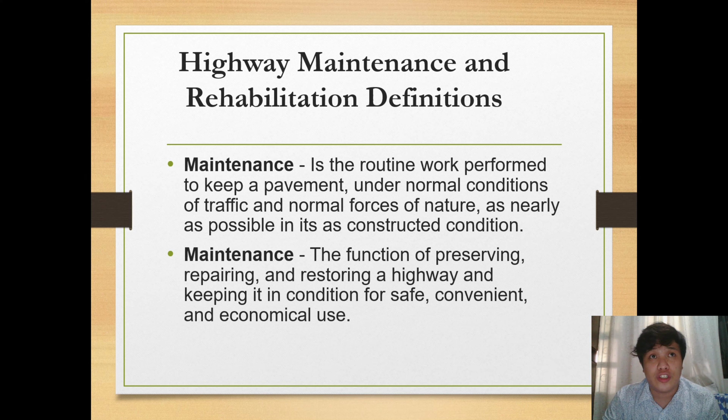Highway maintenance and rehabilitation definitions. Maintenance is the routine work performed to keep a pavement under normal conditions of traffic and normal forces of nature as nearly as possible in its as-constructed condition. It is the function of preserving, repairing, and restoring a highway and keeping it in a condition for safe, convenient, and economical use. So maintenance of the highway is routine work to keep a pavement in condition, basically for use of the people.

It includes both physical maintenance activities such as sealing, patching, filling joints, and so forth, and also traffic service activities, which include painting, pavement markings, and litter removal. Since we are living in a tropical country, we do not apply removing of snow and ice since we only have two seasons.

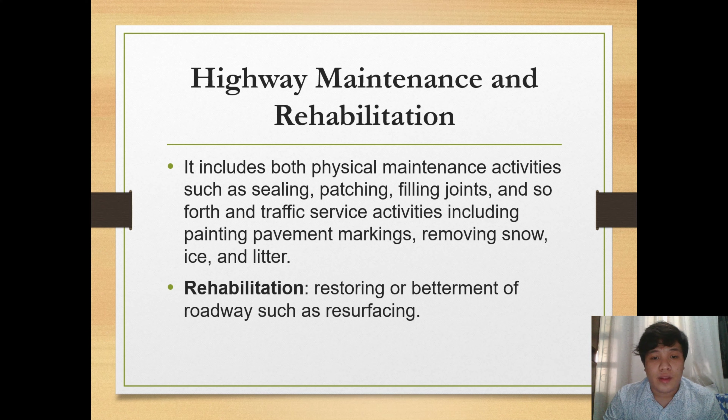The next topic is rehabilitation. Rehabilitation is restoring or betterment of roadways such as resurfacing. When we talk about rehabilitation, we talk about the renewal of the pavements and rehabilitation programs. It is designed to offset the effects of weather, vandalism, vegetation growth, and traffic wear and damage, as well as deterioration due to the effects of aging, material failures, and design and construction faults.

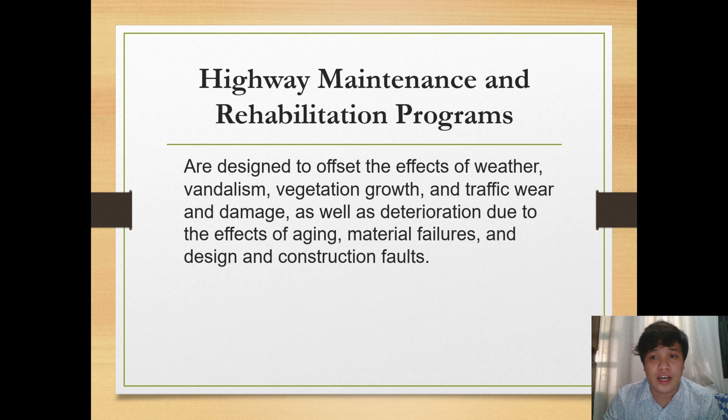An explanation of this is that it is also designed to have a program that can offset the effects of all the stresses that cause our pavement to deteriorate.

So why are maintenance and rehabilitation necessary? All pavements require maintenance, but stresses producing minor effects are constantly working in all pavements. This includes changes in temperature and moisture, traffic, and small movements in underlying or adjacent earth. Distresses are visible evidence of pavement wear, or for example, they are the end result of the wear process which begins when construction ends.

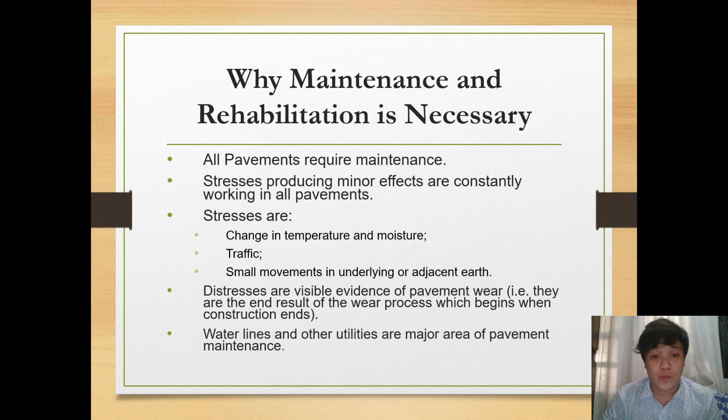Water lines and other utilities are a major area of pavement maintenance. Now, how important is highway rehabilitation, and of course its challenges?

The importance of it is that it protects investments made in highways, economic and safety of the public road system. It is also one of the main reasons why we are having an economic status that is increasing, or I mean, it is one of the reasons why we have our economic status today.

It connects cities from countries to countries and so on. The challenges include increased roads, additional mileage of travel, road function and classification, vehicle sizes, and traffic. The traveling public expects a higher level of maintenance, and there's the size of the maintenance budget.

These are the challenges, because when we have rehabilitation in highways, we need to have an alternate road. For example, that is the increased roads challenge, and also a very particular challenge is the size of the maintenance budget. We need to compute the exact budget for it.

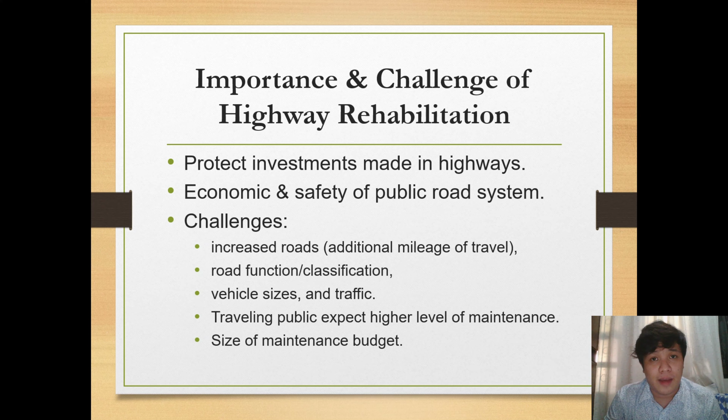Some effects on highway rehabilitation: urban highway rehabilitation projects create problems not only for state highway agencies and motorists but also for commercial premises. For businesses dependent on highway traffic, these projects can potentially disrupt the flow of customers that provide essential business revenue.

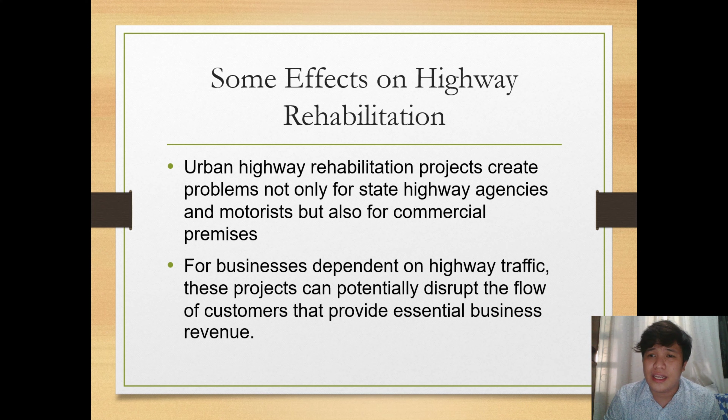Basically, one of the effects is especially for the business industry. Highway is really needed or very important, for it connects the business to the people, allowing it to provide the essential needs of customers, like food, school supplies. We need to have a proper highway, because highway rehabilitation really gives a negative side to businesses.

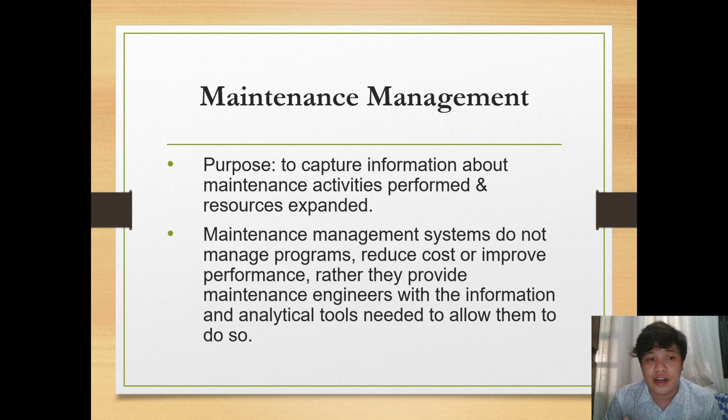Next is maintenance management. Its purpose is to capture information about maintenance activities performed and resources expended. Maintenance management systems do not manage programs, reduce costs, or improve performance. Rather, they provide maintenance engineers with the information and analytical tools needed to allow them to do so. During this procedure, we need engineers or professionals.

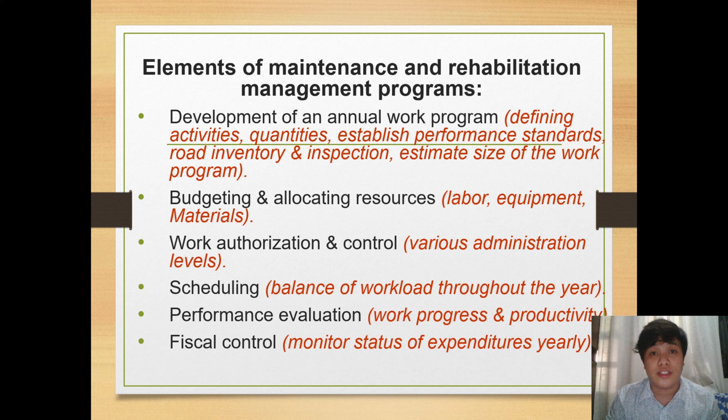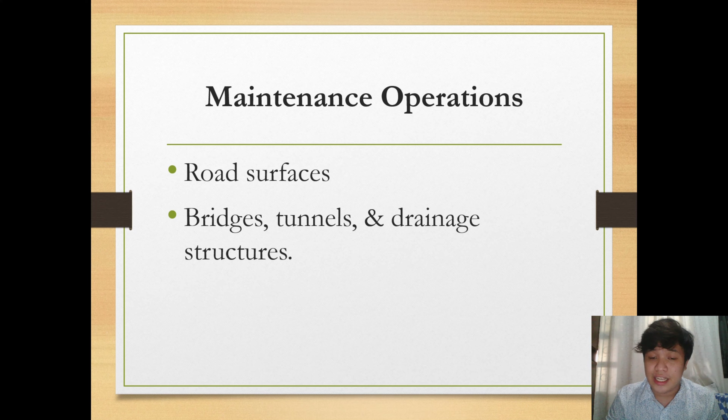For operations, we have samples of road surfaces and bridges, tunnels, and drainage structures. For road surfaces, aggregate road surface failures are due to improper drainage, poorly mixed materials, and inadequate foundation. For bituminous surfaces, failures are due to weathering, failure of base or subgrade due to material quality or compaction, or improper drainage. For plain cement concrete (PCC) surfaces, failure is due to buckling.

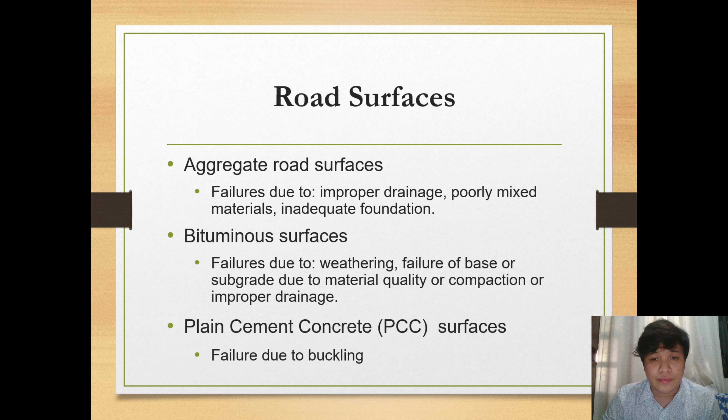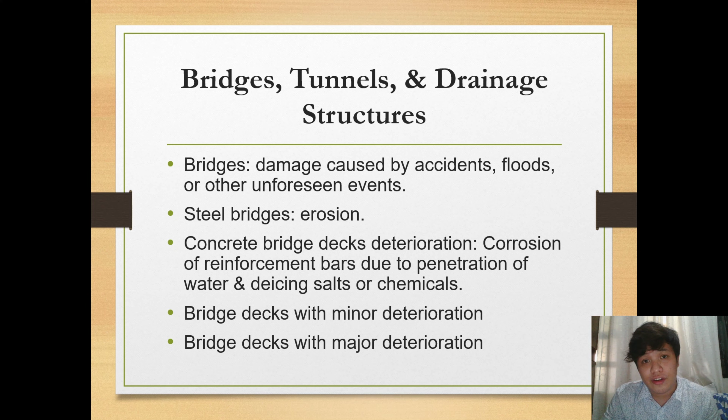For bridges, damage is caused by accidents, floods, or other unforeseen events - mainly floods and accidents. For steel bridges, it's erosion, and concrete bridge deck deterioration is corrosion of reinforcement bars due to penetration of water and salts or chemicals. This results in either minor deterioration or major deterioration of the bridge deck.

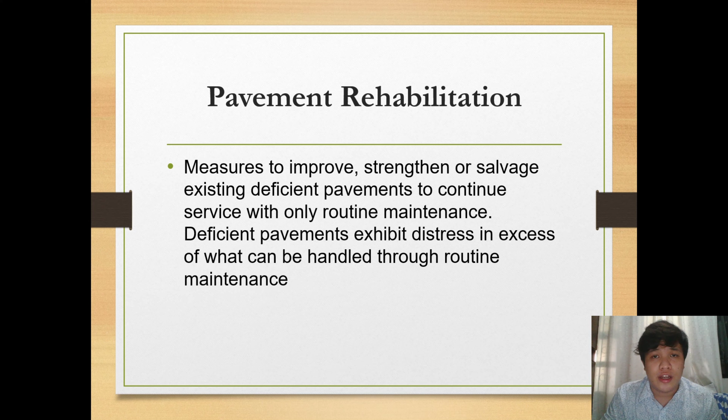Conventional rehabilitation methods include reconstructing with all new material, patching, and overlaying with a new wearing surface. Due to high construction costs, new methods of rehabilitation have arisen, such as pavement milling and pavement recycling, which will be explained by our next reporter.